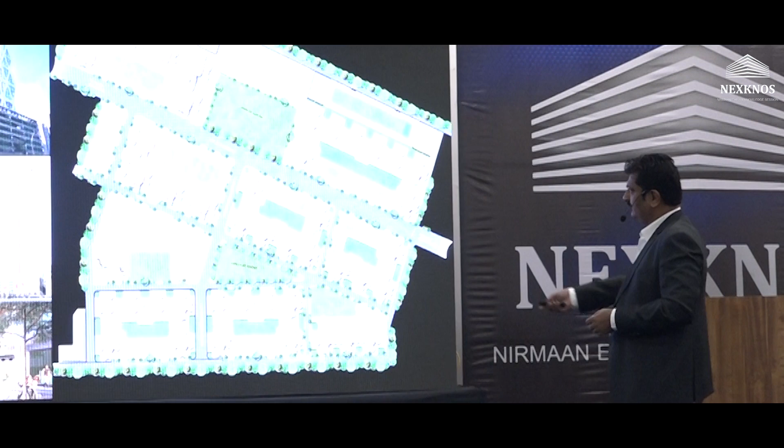This is the biggest township in the country right now, 30 million square feet we are doing in the heart of Mumbai, that is Worli. And already the construction is going on. The layout, we have got the tallest commercial building, 74 floors, 10 towers there, and 33 numbers of 40-story buildings. This is the kind of architecture, like Tushar Bhai said, this is our bread, butter and jam.

I understood what jam is actually. That is under the table money.

We don't think twice. We are doing more than 90 towers currently in Mumbai, 50-story plus. So this is our practice. We do commercial architecture and try to bring something different onto the table, so my buildings look a little different.

No, I don't really want to show you all this. This is the kind of architecture we are doing, everything is there, classical, modern, super modern. And then you saw that commercial building which was parametric, exoskeleton.

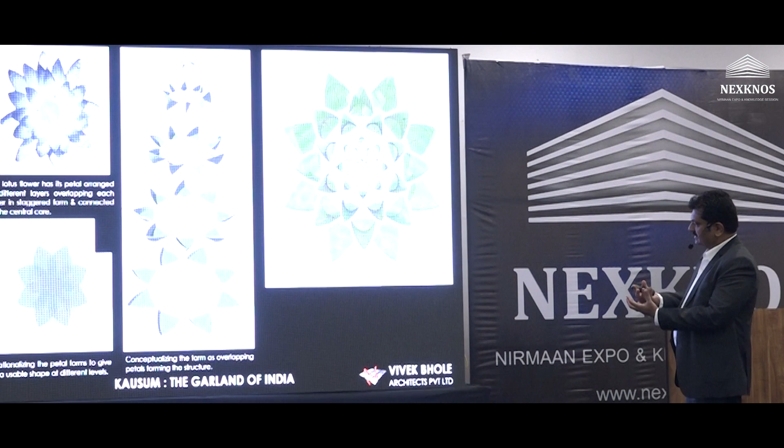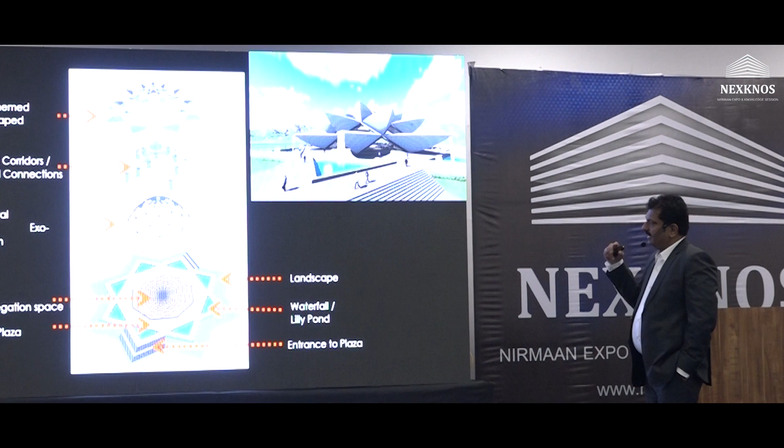This was the surrounding - we studied the climate, and the concept was lotus. If you know the geometry of the lotus, we just converted that into a geometrical diagram. So the pedestal, which is those stepped plazas, then I had those 8 triangular water bodies, and the exoskeleton, which was a steel structure. The exoskeleton had those internal ring corridors, and externally there were those petals.

This whole diagram is a complicated diagram, so it was generated through a parametric definition. Everything you saw in that 3-dimensional form was generated out of this - we never drafted a single line out of it, we just wrote this algorithm there. Inside, there's almost 30,000 square feet of column-free space.

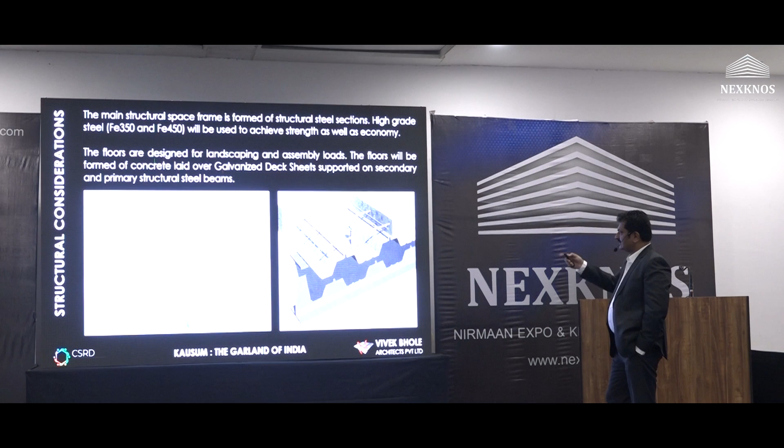We had a lot of working on structure. Once the concept is approved, it becomes very difficult to execute that. Girish Dravid was the structural engineer for this - he did that building I mentioned in the morning, right? This whole skeleton like this, and everything with deck sheet and slab on top of it.

These are the structural consultant's slides. We had to consider a lot of things, particularly when it comes to steel structure, along with soil and garden. Then corrosion is something which is very important, you'll have to take care of that. But the form is very stable.

So when I gave it to the structural engineer, he said, Vivek, I don't need to think whether this building is going to be stable or not - itself, because of the exoskeleton, the form is so stable, I'm just going to run a minor check for the structural purpose. So this is, again, the structural framing at different levels, similar to how they considered it for the Statue of Unity. And then when we actually went into the detailing, the landscape architect and the horticulturist started raising issues, like all these flowers are not just shrubs, most of them are trees.

Their requirements for weather and size of the tree, everything was varying, so we needed a lot of detailing for that. Then came the question of how to control the environment, and the automation required for it. If you see the petal, the hollow portion is going to be used for a lot of that engineering. Although you see only the top portion, there's a lot happening underneath, and the complete greenhouse will be fitted with smart sensors.

Because this is the first of its kind development, and the total budget was less than 100 crores, we are very confident that Himachal Pradesh, being a state that prioritizes tourism, this project is going to fetch a lot of tourists. It will certainly become the best location where people will visit.

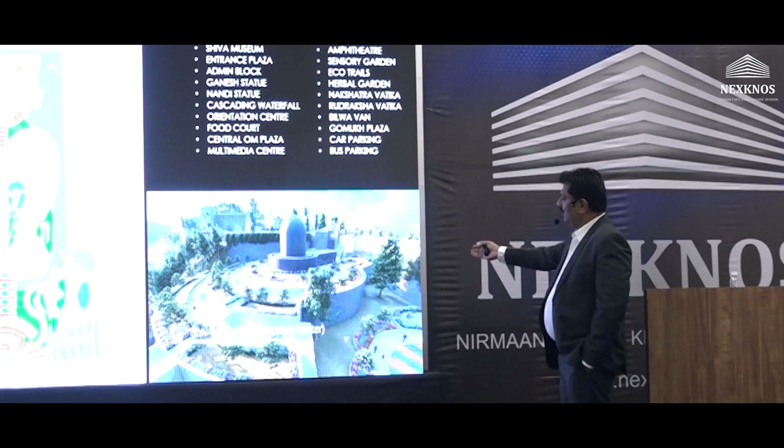From there, the path goes up with a series of steps that take you to the goal, which is the statue—a 110 feet tall Shiva statue. When you enter, there's the Ganesh statue, then what we call the Ganga Kund, and it goes inside. On the other side, we have an orientation center where initial information will be given to people. There's also a food court, and because Shivji is Pashupatinath, you will see a lot of animals surrounding this Damru, which we call the Damru Mandala.

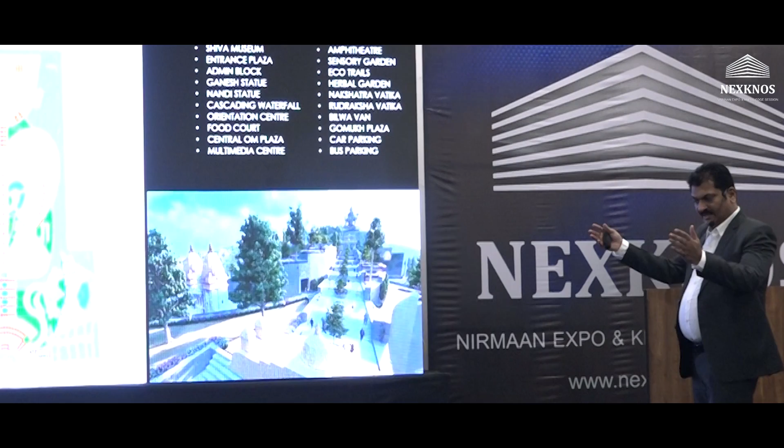All these Jyotirlingas are mostly built to scale, and the ones that were too big, we had to scale them down a bit. Then there are different lakes and kunds which are going to collect rainwater that we will harvest—we have six kundas in the entire layout.

And then we call this whole path as Moksha path, because finally the goal is to reach to Moksha.

So when we started excavation, in fact, they could not do the entire survey because on one side there was a steep hill and there was a huge jungle. So when I went for the first time on the site, they said, "Sir, please don't go that side. There was a leopard seen." Still, I went inside with few people, but then it was so dark and the plantation was so thick, so we could not go inside. So survey was not possible.

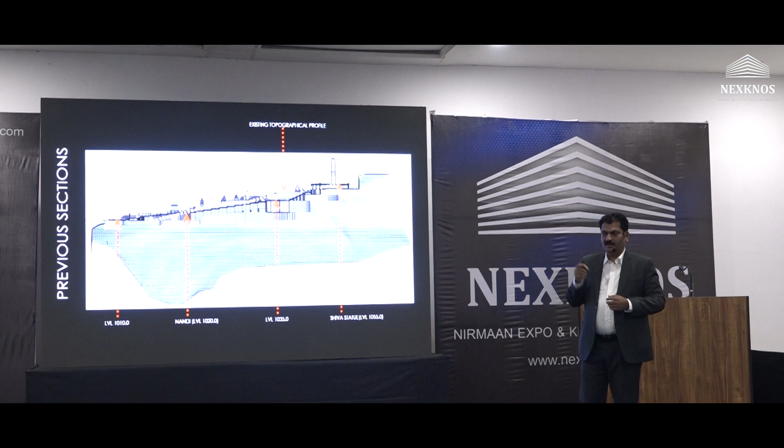Once the survey was started, somehow we saw that the slope was 1:2, and below there is a valley. So to actually dilute the slope, because if that is 1:2 slope, you cannot really work on that particular site. And the retaining wall, if you know about the strata in Himachal Pradesh, it's a fissured rock. So the retaining wall height was going very high. So we had to scoop out the top portion to dilute the slope on the sides. So you can see we actually cut down the hill in such a way that the side slopes are diluted.

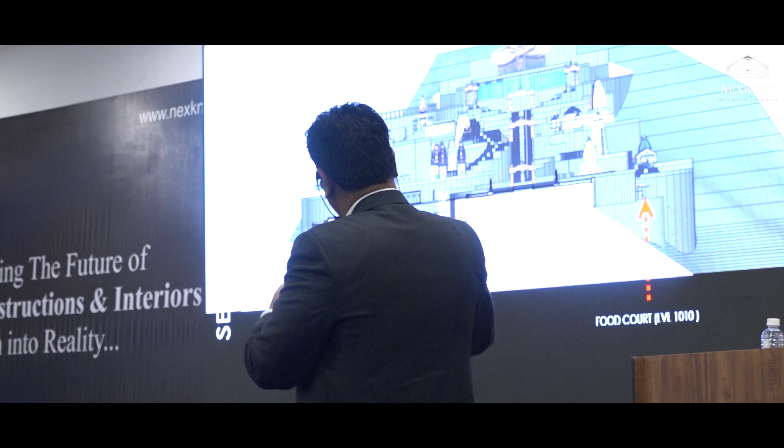A lot of iterations were done, working in 3-dimensional was done, and we calculated the excavation quantity because this was item rate kind of contract. So we had to actually calculate the excavation in such kind of terrain. So you see the existing terrain and now the final terrain is something which is totally different. So we actually shifted the soil inside only, and actually there is no debris or excavated earth coming out of the site.

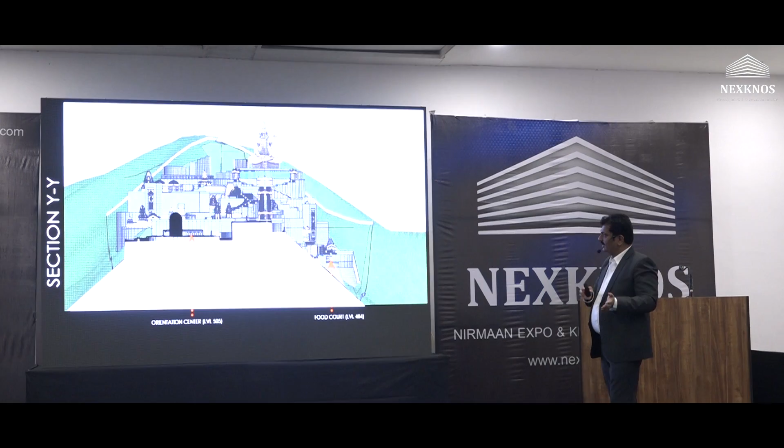There was a point of time when we were stuck up and we were not actually getting the grip of the subject. So we had a Zoom meeting, and Prashant Bhai took this responsibility. He said, "I'll give one sketch." And he made a wonderful sketch on his iPad digitally in 2 days. And again, we came out of that deadlock, and we worked further on that. Thanks to Prashant Bhai. So this is that observation center, museum kind of arrangement. I actually will have to again go back to your Gandhi Dham there and study that. Multimedia we'll have to use, then food court.

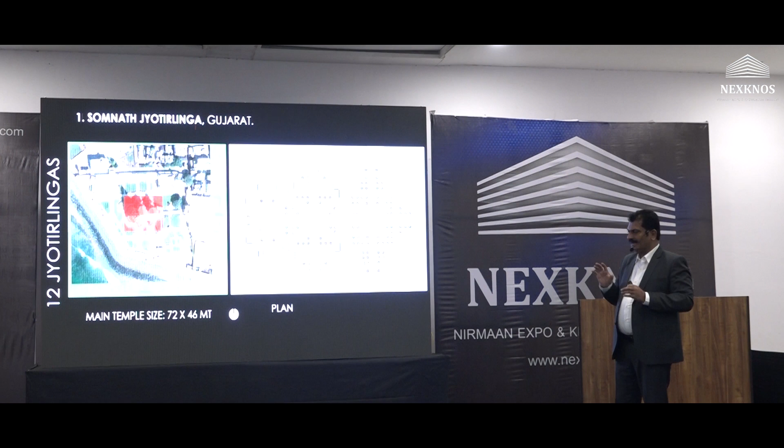And then we actually measured each and every temple; taking dimension of each and every temple in the lockdown was a task by itself. 9 out of 12 temples, RCC is complete. So we had different methods and means of doing this. So we had a lot of interaction with different Sompuras, Sthapatis and Shilpis. And we came up with the idea where the internal structure will be RCC, the external will be cladded with stone. Depending upon the budget and the cost of the stone and the surface required, we have detailed out every inch of the temple, every temple.

And we have used multimedia kind of thing. So we have even plaster in some places which looks like stone, but majority of it is stone. The scale, like I said, majority of them are 1:1 or 1:1.33. And this is the construction technology, where internal is concrete, multimedia, what we used. Statue of Shiva has also started on site. Again, I'll have to discuss with you. We are going to do the same mistake. They want it in concrete. So yesterday we were discussing about that, your project in Sikkim.

Every garden, we have got different theme for that. And again, this is one of its kind spiritual complex. Sikkim is for Char Dham, but this is for 12 Jyotirlingas, much bigger and much wider in scope, and more visibility is there. We are thinking that this is going to fetch a lot of value in terms of tourism, and this being the constituency of the CM, it becomes a very important project for the state.